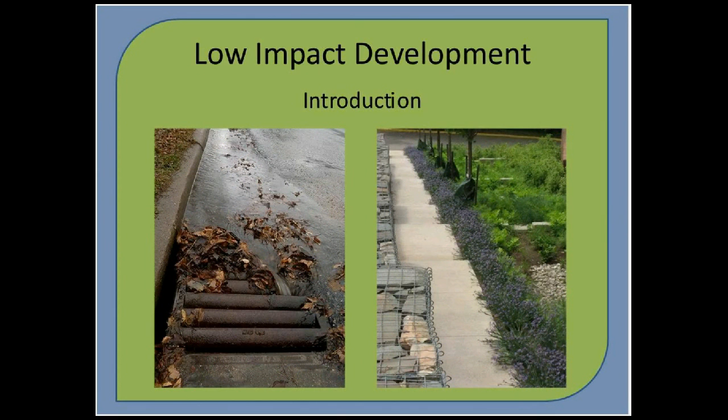Before I pass the webinar over to today's presenters, I'm going to talk about low impact development, how it helps to manage stormwater, and the upcoming regulation changes that will affect the use of low impact development on new development and redevelopment projects in Washington State.

LID, or low impact development, is an approach to managing stormwater that helps to protect water quality, reduces or slows runoff amounts, restoring groundwater recharge, and healthy habitats. Some of the techniques included in low-impact development are rain gardens, which are shallow depressions with amended soils and vegetation designed to mimic forest floors that absorb and filter stormwater.

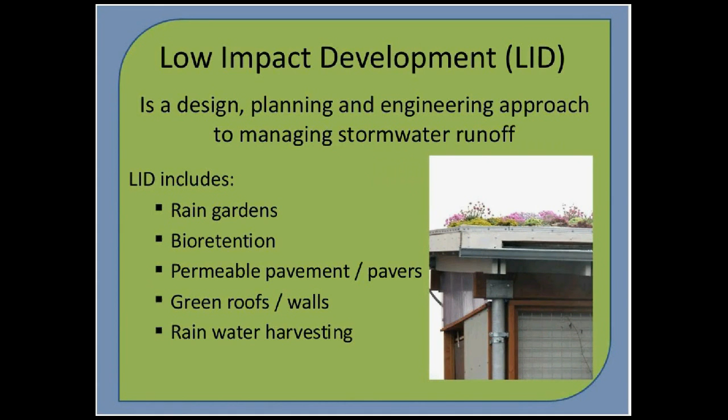Bioretention facilities, which are much like rain gardens but are engineered and modeled to store and treat a specific amount of water. Permeable pavements, which have voids in its structure intended to allow passage of water through the pavement and into the ground. Roofs or walls layered with waterproofing materials, growing medium, and vegetation designed to help slow water, and rainwater harvesting systems, which use barrels or cisterns to capture rainwater for uses like irrigation or flushing toilets.

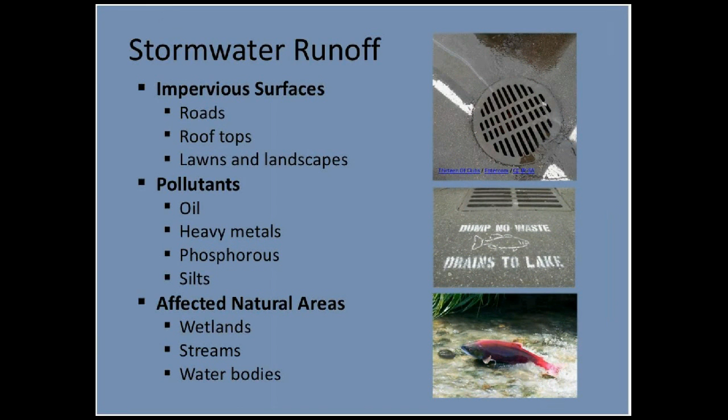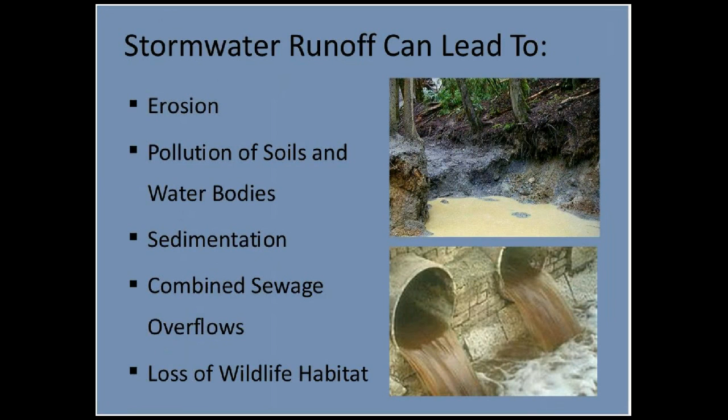So why are we using LID and why is stormwater bad? Well, stormwater runoff is the result of rainfall on impervious surfaces such as roads and rooftops, where it picks up pollutants and carries them to local waterways. Stormwater runoff is one of the largest sources of pollutants in urbanized areas of Washington State and is the largest contributor of pollutants entering the Puget Sound. Stormwater runoff can lead to erosion, as you can see in the top right photo, pollution of soils and water bodies, sedimentation, combined sewage overflows, and loss of wildlife habitat.

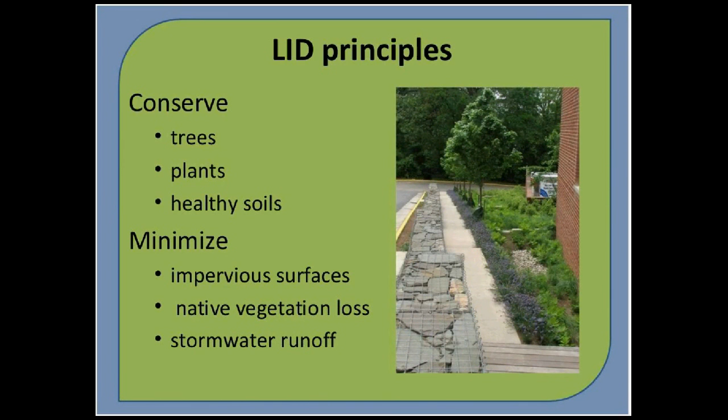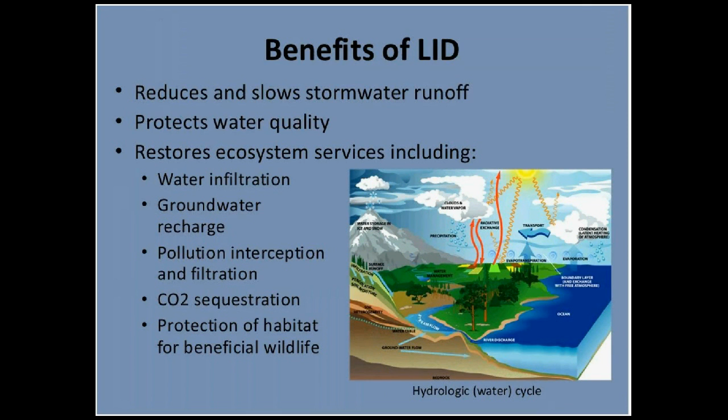Through these principles of conserving trees, plants, and healthy soils and minimizing impervious surfaces, native vegetation loss, and stormwater runoff, LID strives to manage stormwater where it falls, increasing the area and distribution of stormwater infiltration, thereby reducing its concentrated entry into water bodies. LID has many benefits, the most important of which are that it reduces and slows stormwater runoff, protects water quality, and restores ecosystem services.

Stormwater is regulated by the Clean Water Act, the National Pollutant Discharge Elimination System, the Washington State Department of Ecology, and by municipal permits. Regulatory changes are coming to Washington State. The Department of Ecology is making regulatory changes to stormwater management and the use of LID to address the negative impacts of stormwater in our urban and natural landscape. Regulation changes will take place between 2015 and 2018, with most cities and counties adopting changes by 2016.

In Western Washington, regulations will require the use of low-impact development on new development or redevelopment projects like housing or commercial developments to help manage stormwater on site. In Eastern Washington, the use of LID will simply be allowed. Each city and county will decide on how to adopt these changes. The Department of Ecology stormwater regulations will be the minimum. Some cities and counties may decide to expand upon these regulations. Check with your local planning departments to understand exactly how these regulations will be applied in your area.

Because cities and counties are currently determining how they will adopt these new regulations, now is a good time to get in touch with your local officials to give your input on how these regulations should take effect. The Municipal Research and Services Center of Washington is a great resource for finding the right officials to contact. Contact officials in the planning departments of your cities and...

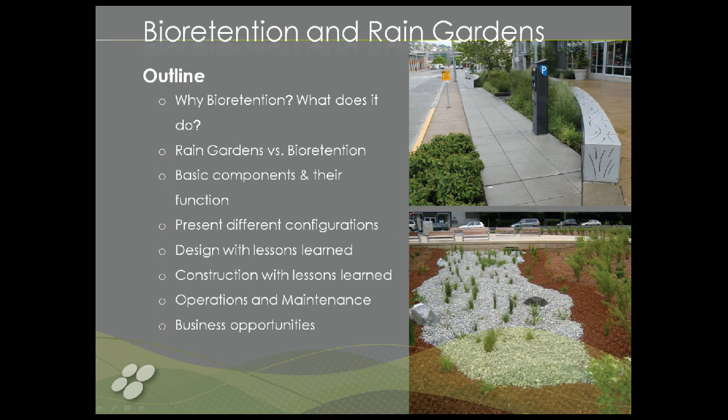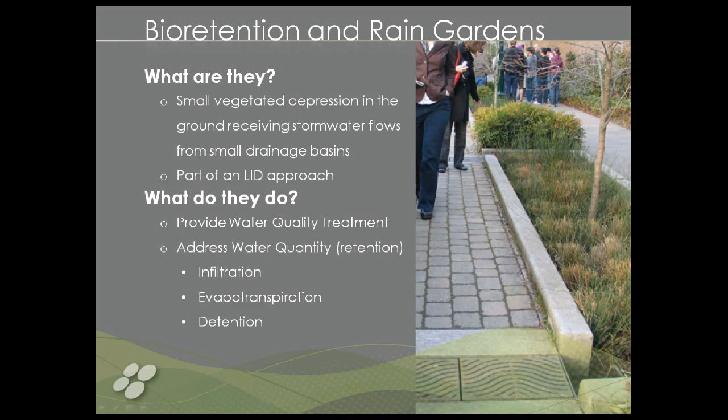And as engineers, we can account for bioretention cells that meet these specifications in a different way than we can count the presence of a rain garden, which has looser specifications, maybe built by a homeowner or in concert with landscape professionals such as yourselves. Bioretention cells can be built on a private lot or in the public right-of-way as part of the public stormwater system.

Rain gardens, on the other hand, while there is quite a bit of overlap with what would be considered a bioretention cell, are typically based on sizing tables, or they are allowed to be based on sizing tables, allowing the design to be done by non-engineers using some pre-sizing, rather than running the kind of complex modeling software that engineers typically run to design bioretention systems. Specifications can be a little bit looser, and mostly that relates to the soil.

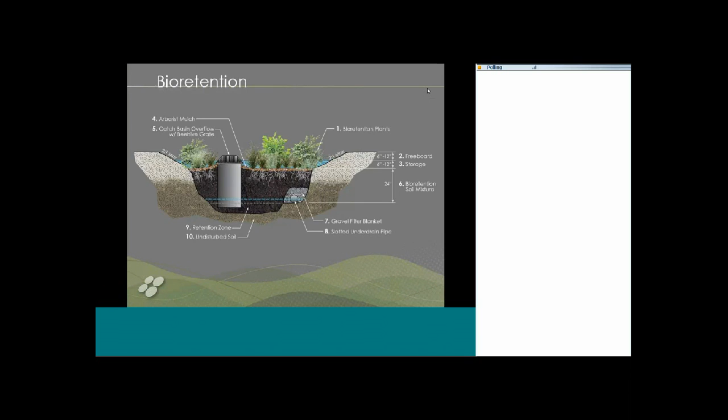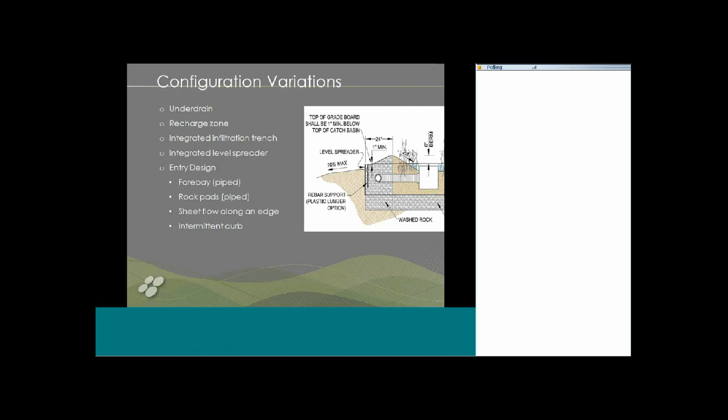And here are some of the components of the design that could vary: the presence or absence of a recharge zone, the presence or absence of an underdrain, the presence or absence of an integrated infiltration trench, integrated level spreader, and then many, many types of entry designs, which is how to control the water entering the rain garden or bioretention cell, be it with a forebay, which is where we have a small basin at the head end which can trap a lot of pollutants in a very concentrated area, to rock pads, sheet flow along an edge, or even a broken curb in a street application.

The point of this cell is to simply evapotranspirate and retain stormwater, slow the water down, and potentially provide a water quality function for certain roofing materials. And I've worked on projects, and you'll see some photos of them, where we've used this concept to integrate the rain garden or bioretention cell right into the architecture.

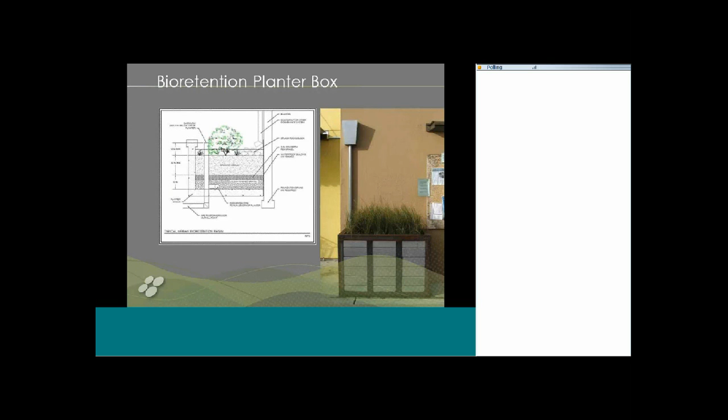This is another example of a bioretention cell project of mine that's for the Federal Way Library, where we integrated the bioretention cell right into the architecture so that when you're in the building, you can look out on the bioretention cell. A casual observer might not realize it's there, but you can see the overflow structure. This is just another way that a bioretention cell can look.

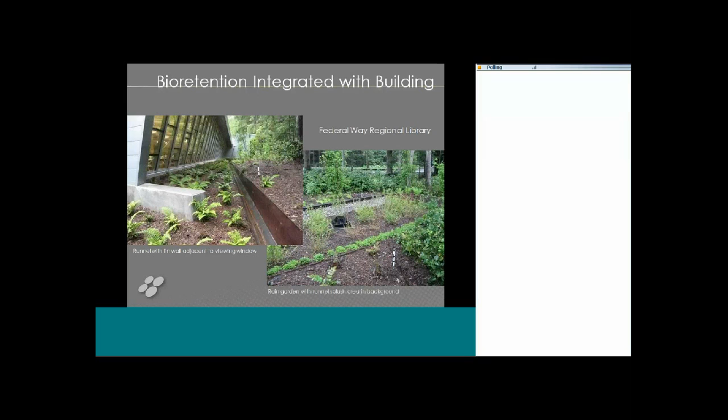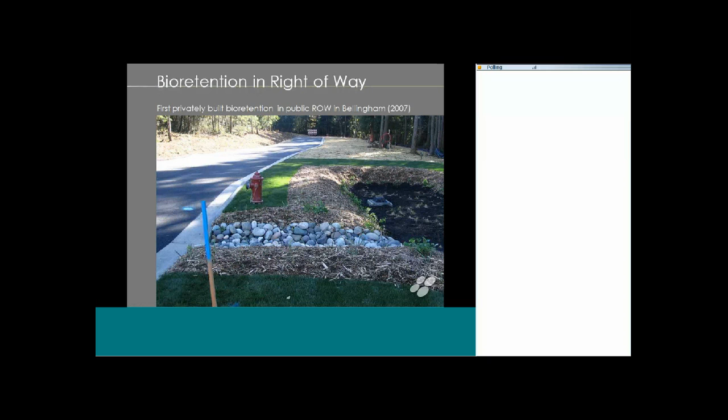And in this case, we used a little river rock entry to slow water down and to have it enter the bioretention cell in a controlled way. This is before the plants got put in, obviously. Another example of a configuration that can work.

But the other thing, which I think is a more powerful message, is in many jurisdictions, the requirement for landscaping and the requirement for stormwater management can occur in the same location, which, from a developer point of view, will allow developers in some cases to build what is essentially a private stormwater management element, partially or completely in the public right-of-way. That's not allowed in every jurisdiction, but I think with bioretention, it's something that is possible, and I think is a huge value that's created.

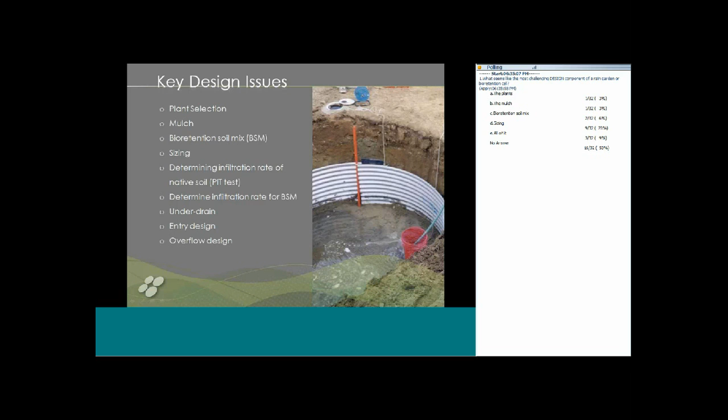With construction, and this is really something that probably Jesse will dive into in greater detail, but from my experience on projects of mine that have been in construction, I see staging issues as being critically important, staging materials, keeping other people from staging materials in what will ultimately become the bioretention cell or rain garden. Sourcing materials is probably one of the most important, is to find a good source to either create, mix yourself, or purchase bioretention soil mix.

Those of you more in the Puget Sound area will have no problem securing that from a vendor. Maybe some of you actually are vendors of the soil, or mixing it yourself. On projects of my own, having contractors mix the soil themselves has been very problematic, again, mostly because of specifications and trying to articulate the issues. The gravel filter blanket, that requirement is to be a particular gradation to separate the materials. This is to be used in place of where you would normally think to use a geotextile, and of course the mulch.

Testing your soil to see that it meets specification is very important to make sure that if you're purchasing it from a vendor, that you're getting a nice homogeneous mix that has the right amount of sand, and you didn't get a scoop off the bottom of the pile that maybe has too many fines and so forth. And there are testing for that to verify infiltration rate. Preventing compaction is critical, both of the surface itself when it's built as well as the subsoil to maintain its function to infiltrate.

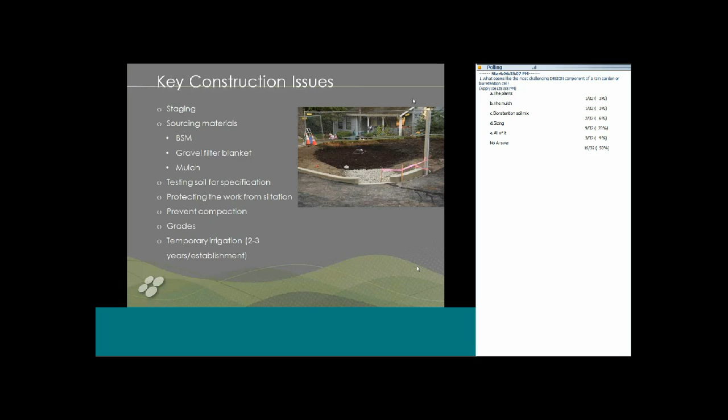What's that? And then we're going to put another poll out there, so in terms of getting your feedback on what you think the most vexing or challenging construction issues are.

So some lessons learned here as we wrap up this section: number 1 is, of course, no filter fabric. Some of the early notable failures of bioretention cells on the East Coast were related to the use of filter fabric, so that is not to be used. Bioretention cells need to fill up and drain down like a bathtub, so the bottom needs to be flat, because they're not bioswales. The idea is not to convey water, but to simply allow it to fill up and drain down.

Base flows. This is a lesson learned from me. Very often we get all of our footing drains and all of our roof leaders, and we put them all together and we run them into our stormwater system. And I found out the hard way on a project where if your footing drain intercepts a small seep, you can add a base flow to your rain garden, which will cause it to be saturated more often, and the plant community will not thrive. So that was a lesson learned.

Don't make the cells too big. These are supposed to be small and distributed throughout the site, and we're not trying to do one big cell for a large site. When they get too big, contractors typically use large equipment, which tends to cause compaction, and there's a lot of merit in keeping things small. Integration with surrounding grades and specifying elevations I mentioned. The soil spec we've discussed, getting that spec right, using the regional spec, a 60-40 blend of sand and compost, getting our plants right, getting our mulch correct, and making sure the O&M is provided, and that's a huge issue.

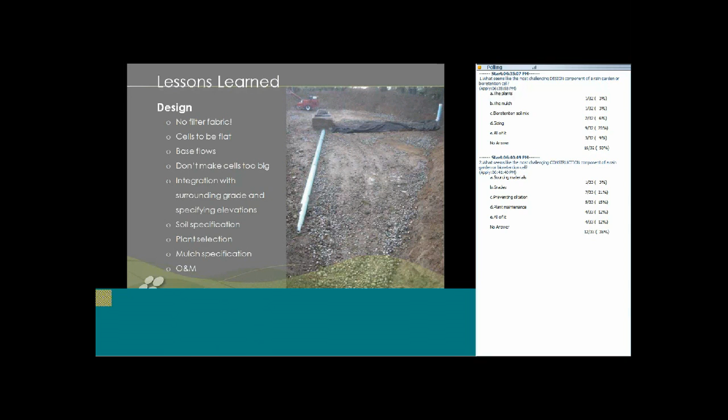Like any stormwater system, these systems need to be maintained, and too often stormwater systems are not. So within construction, erosion control, of course, is an issue. In terms of being a little lesson learned, that is a rain garden on the upper right there of mine where the soil spec was not correct, and that was the ponding condition, and that water hung around way too long, and we had to fully replace that soil. So each of these lessons learned I'm sharing are kind of from my own experience.

Compaction of subsoil, like we discussed. Pre-mixing versus site mixing soil versus tilling. Pre-mixing as a designer is certainly my preferred. Those of you who feel comfortable in mixing your own sand and compost, probably fine. I've had problems in the past with site mixed soil because communication doesn't happen, and we get topsoil mixed in there, and we end up having problems. Testing, getting testing of the soil, or working with approved vendors. And my preference as a designer is to work with approved vendors. And then, of course, make sure we have our temporary irrigation to maintain our plants.

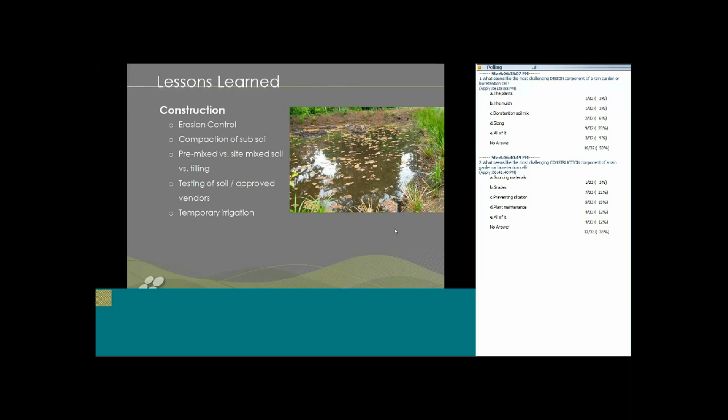Okay, lastly, I want to address operation and maintenance, about what is typically part of it for a bioretention cell, and really overall it's probably some things that are more in the realms of the obvious here. We're removing trash. We're using IPM to remove pests because these are for stormwater management. We don't want to be using a lot of pesticides and fertilizers. If we need them, perhaps an organic slow release, but prefer that we don't add nutrients. The soil is usually plenty healthy to support the plants. We're wanting to maintain the plants, weed, prune, replace, and remove as needed.

And really, the mulch, frankly, for me, is the most important piece of maintenance. It's about removing contaminated mulch as needed, and that's really on a visual basis, because really that's where our pollutants are. And so if these cells are serving a water quality function, removing that mulch also removes the pollutants, and we typically dispose of that with the trash. And then maintaining our structures by cleaning out our catch basins and so forth.

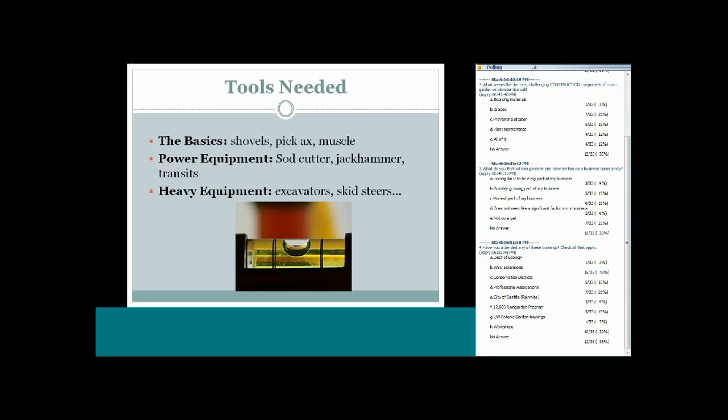So to talk about heavy equipment real quickly, like Chris said, I just want to echo, you really shouldn't be doing projects that require heavy equipment because of the soil compaction issues and other issues, but it certainly does make things go a lot quicker. And things that you want to consider, I wanted to point out, not only the weight of the machine, and I have the photo here to show weight distribution mats. When we do use machinery, we always have our mats with us, and they get loaded with the tractor or the skid steer, and that distributes the weight a lot more evenly across the surface, so you do less compaction.

And if you don't have the budget to buy all that stuff up front, you can use plywood if the machinery is not too heavy. We have used stall mats on occasion, which are the thick rubber mats that go in horse stalls. So something to keep in mind if you are going to use heavy machinery. And even in this climate, if it's moist out, which is fairly often, this is even a great technique to use if you have a wheelbarrow path and you're running wheelbarrows back and forth.

So the other thing to consider is width. A lot of landscapes nowadays have a very minimum side yard width, which some machines won't fit through, so that's something to think about. Your digging depth or lifting capacity, these are both important depending on the depth or how far you have to reach with a certain weight. So when we install rocks, we have to be very careful that we're not going to be tipping our machine.

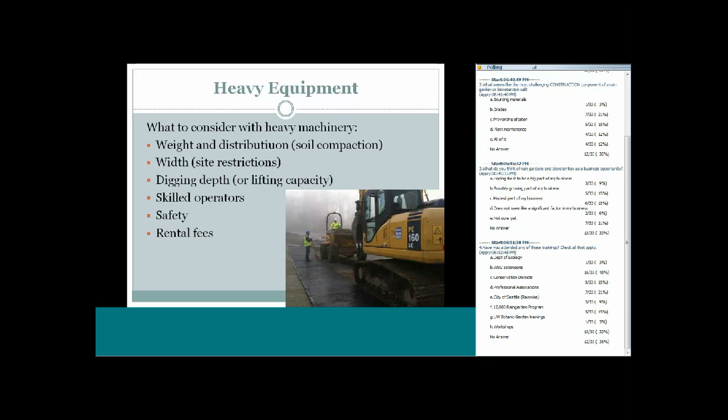So costs. There's a lot here to think about, and this is going to vary for every project and every company. And I throw out $3.50 as a square footage price because that's what the standard rebate is offering for SPU. And we have looked at this very carefully because we wanted to know if it was possible to be installing these so the homeowner didn't have to have any expense out of pocket. And our answer was no. It's not possible, but the way that our business works, we have a fair amount of overhead with just employee benefit packages and tools and things like that. So our overhead might be a lot higher than other companies.

And we did come up with a worksheet that we do a pricing and description for our clients, so we can show them what $3.50 would get if their downspouts didn't need to be altered, or if we didn't have to trench 50 feet through rock. There's a lot of things to consider here, but it would be up to you to figure it out and how you already do estimates for your projects.

So time and material is one way to look at it, which we generally do because rain gardens are all different and they have to be spec'd that way based on their sizes. And per project is another way to do it. At one point we were trying to come up with just a price for one rain garden depending on a minimum calculation for square footage.

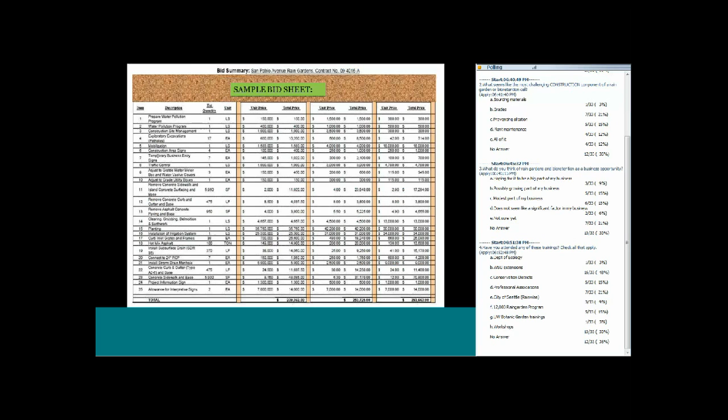So, lessons learned. I wanted to share some of our experiences with you. Calculations are critical, not only the square footage calculations, but the perc test calculations. As a part of doing rain gardens, I encourage everybody to have the manual in your vehicles, wherever you need them, in your toolbox. Every single one of our trucks has one, and our crew is very familiar with all the different formulas that are necessary.

The other thing is do several infiltration tests. This is very important in urban areas where you don't know what kind of soil you're dealing with a lot of the time. In Ballard, we did one job that had really horrible draining soil, and 4 feet away from one infiltration test pit, we dug another one, and it drained beautifully. So that is something to definitely look out for and to keep in mind when you are designing rain gardens.

Do that ahead of time, preferably, but it's something that you might need to adapt to when you're actually doing construction too, because it's hard to know exactly how the soil is going to drain when it's excavated in an urban area. You might find some wide variations in a very small space. You might also find buried bathtubs or other kinds of weird things. It's really common. We seem to find a lot of those.

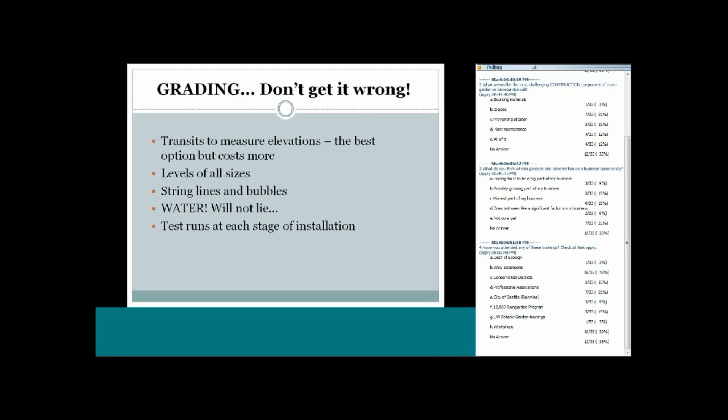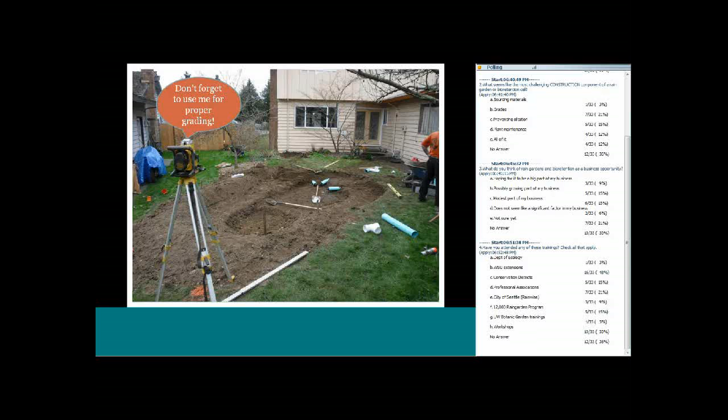So here's a lesson learned story for you. Now this is a project that we were called in after it was designed, and we were hired to do the installation and maintenance of it. And as they were excavating it, I got a little worried based on calculations I did quickly in my head, and I raised the question of, were there any perc tests done? And the answer was no. There was no perc test done. They were simply going off of a soil analysis done from a soil scientist.

It is the largest rain garden in King County on a residential site, and there were a lot of problems here, but the perfect storm happened in that it was under construction. It wasn't necessarily designed correctly given the perc test, and that site analysis wasn't done thoroughly. But we did take care of it. We found solutions.

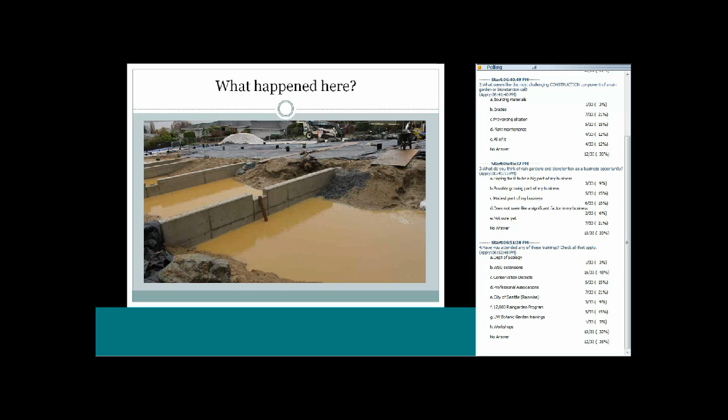There's a solar array over the garage. We just took the gutters off entirely and have little rain gardens underneath that. We took all the water from the driveway and we directed it to another rain garden. And then this large rain garden here that has the 5 cells, the bottom collects into a pond, and so we basically turned that into habitat. But the overflow of that goes into yet another rain garden and then into bioswales. So the water is still distributed on the site, but it took that event happening for the redesign.

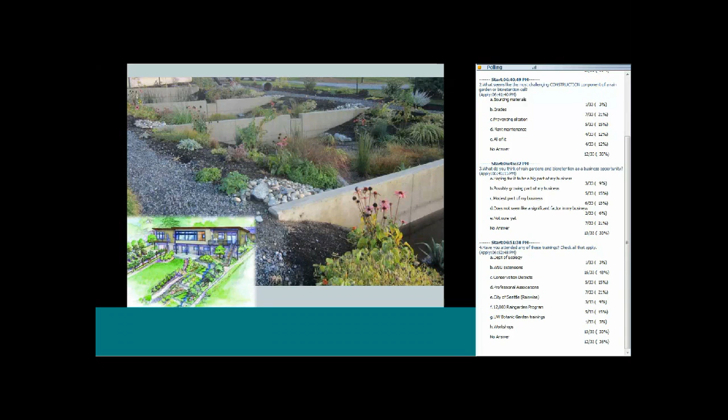And now the landscape's beautiful, it's functioning well. We also had to change the specs in the soil and raise the grade quite a bit for it to all work correctly.

So I'm a big believer that rain gardens can fit any size, site, style. Size is definitely dependent on the setbacks and the availability of space, but there's always ways to infiltrate, and depending on the landscape style, I've seen really beautiful modern rain gardens. I've seen really naturalistic ones. I've seen a lot of different ways to do this, and again, Pinterest is your friend here if you want to take a look and see what's out there. Get inspiration from that.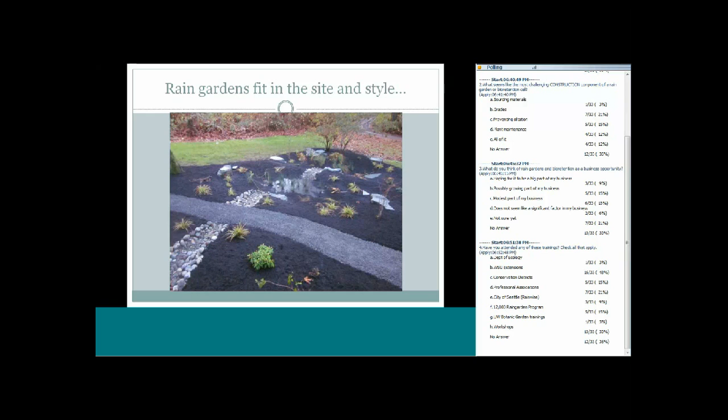So I'm going to wrap this up here pretty quickly. I just wanted to show a few more photos and examples. This is a rain garden at our office. This is another selling tool for us. We do meet and greets in our office, and we have client meetings.

And when I'm talking about rain gardens, I can go, hey, let's go outside and take a look at one right here. And they can see the size, the beauty, see it functioning really well. And that's a good selling tool for me.

And so prepare them in advance, and the first time a rain garden fills up and it's still pouring down rain, they might get concerned. So just prepare them in advance. And know that when rain gardens are built, the drainage seems to improve over time.